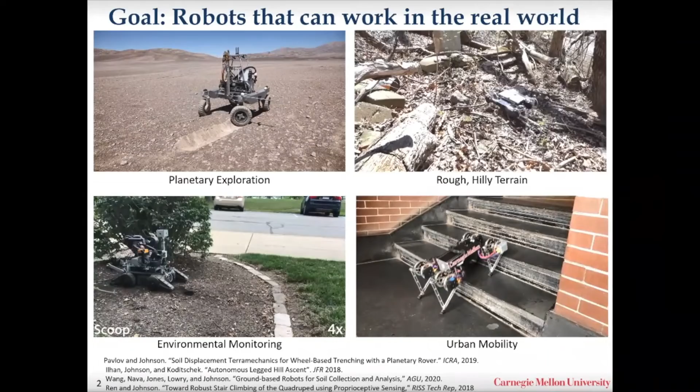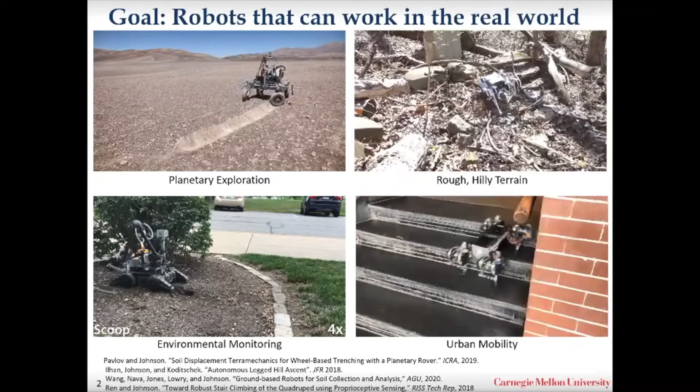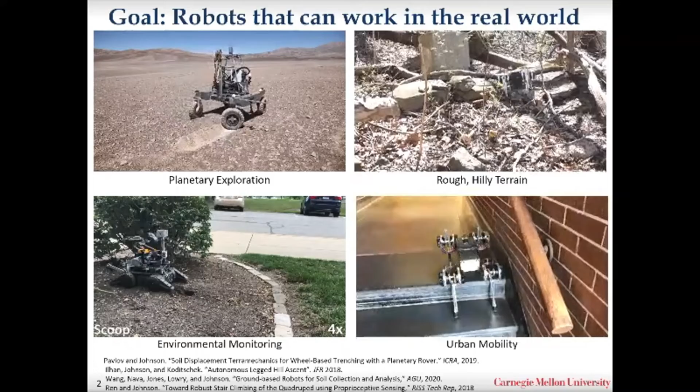So, as you mentioned, my name is Aaron Johnson. I'm an assistant professor at Carnegie Mellon, and my lab is interested in building robots that can go anywhere in the world. So we want to take robots out of the warehouse, out of the factory, and into more unstructured environments. And whether that's rocky, hilly, broken terrain that you'd find in natural environments, or stairs and sidewalks and curbs and clutter in human environments, the big difference is that we can't control the lighting, we can't polish the floor to be perfectly flat. And we're not going to know the friction. We're not going to know exactly which rocks are loose and all of these things.

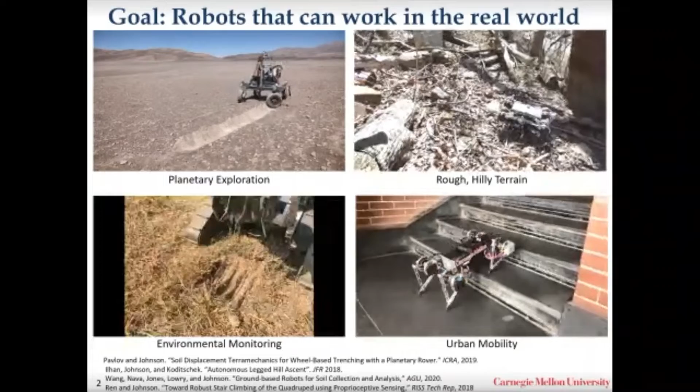So here's some of the applications that we're thinking about. Things like planetary exploration. Here's a Mars rover type vehicle running a test where we're using the wheels to dig in the sand instead of having another tool to do that. We also have a big project right now on environmental monitoring. So sending robots out to collect soil samples and look for contaminants in the soil.

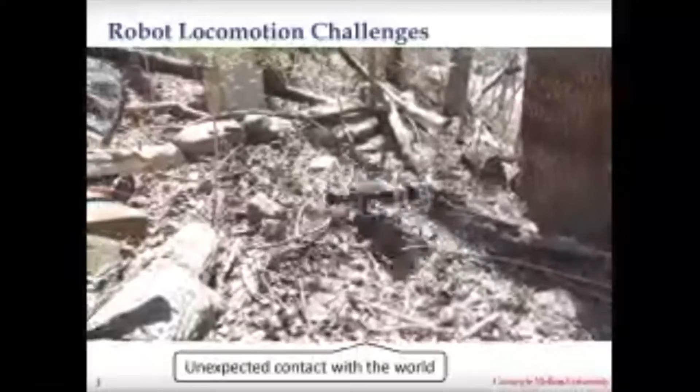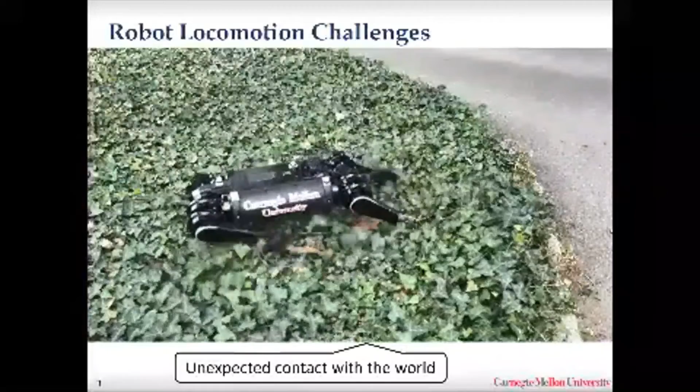And what are some of the challenges that come from these kinds of environments? So on the locomotion side, here's a blooper reel of some of the robots in my lab playing in the park behind campus. And what I want you to notice in all of these examples is that the failure really starts from unexpected contact with the world, either bumping into something you didn't think you were going to bump into, or trying to put your foot down and not having something there to support it. So here this robot is just trying to walk around, and it doesn't know that its leg is hooked on this ivy as it's moving. Or here it's bumping into this log that it thought it could step over, but it can't. And so it's running its shins into the log.

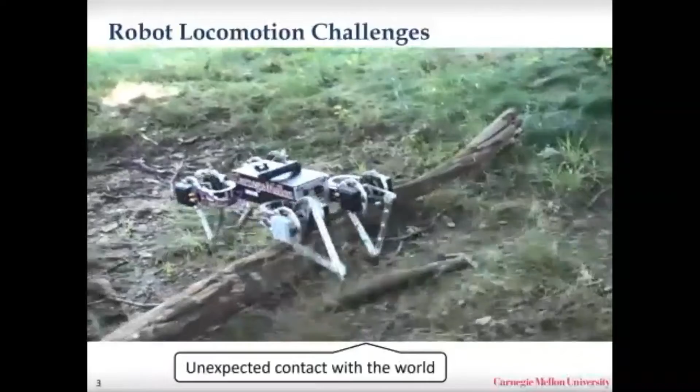Of course, the flip side is if you think that you're going to make contact and don't, that can be just as bad, if not worse. So for instance, in this video here, the robot's going to take a few steps, and then it puts its foot down, and there's not really as much support as it thinks, and it rolls over.

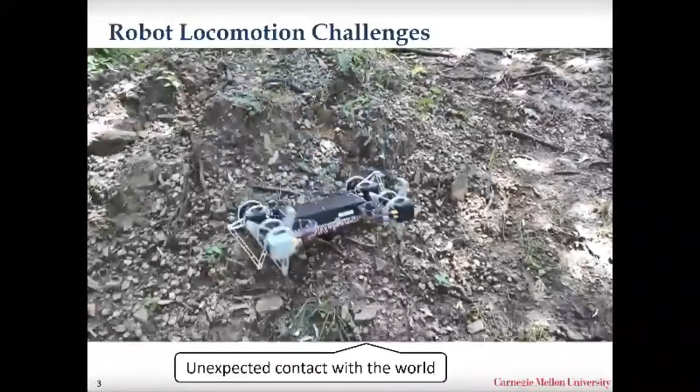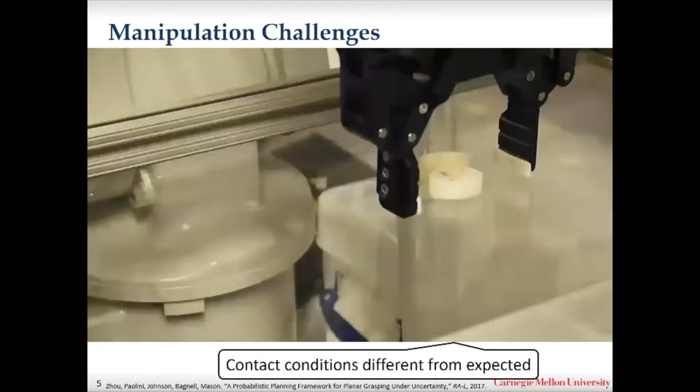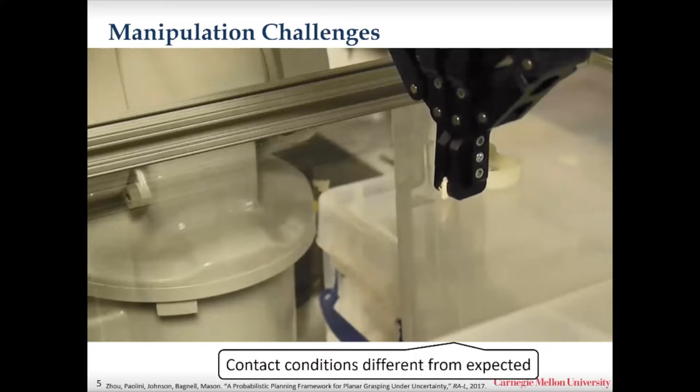There's also a big problem in manipulation. So it's not just locomotion. Here's a blooper reel from a paper we had picking up small objects, where all of the failures can be traced to either bumping into the object early, or having friction that didn't match what the model said, or just failing to bump into the object when you were trying to push it. And so this motivates the two key challenges that we think about in my lab of contact and uncertainty. And the challenge with contact is really the discontinuous nature of contact.

If you've got your foot 1 millimeter above the ground, then you get no contact force. And then as soon as you touch, you can have very large contact forces. And so this inherent discontinuity makes it very challenging to operate with.

And then uncertainty. Again, we're not going to have a perfect model of the environment that we're working in, and we can't control it. And so we sort of accept uncertainty as a given and work on designs and algorithms that embrace that uncertainty.

And then, of course, these two things play into each other, where if you have a discontinuous process like contact, where a small difference in state makes a huge difference in your contact conditions, then uncertainty plays a big role in that.

So in today's talk, I've pulled out two recent projects from the lab. The first on the more robot design side, looking at tails, and the second on the control side, looking at state estimation with contact. So I'll start with this sort of cheetah-inspired tail project. And this was with students Joe Norby, Jun Yang Li, and Cameron Selby, and then our good collaborator, Amir Patel from the University of Cape Town, South Africa.

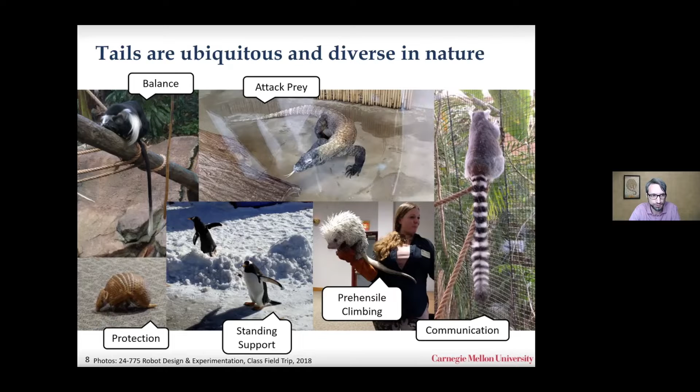And animals seem to be using tails for all sorts of things, either as balance or attacking or defensive postures, as well as communication. The lemur's tails, the reason you stripe your tail black and white in such a high contrast is so that it's easy for your friends to see you when you're trying to get their attention.

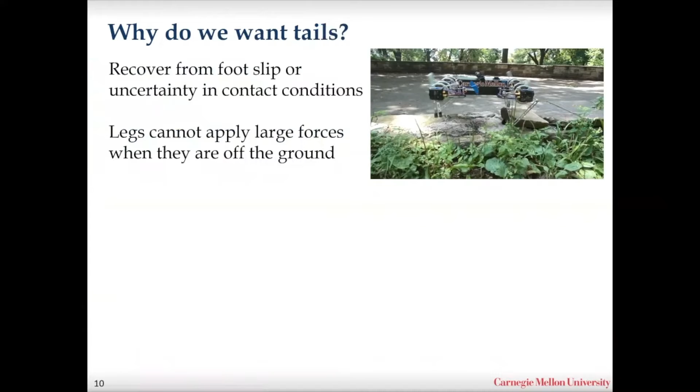So what do we want tails for in robotics? Specifically in this project, we're thinking about how do we recover from foot slip. If we're going to have uncertainty in contact conditions, we know that our feet are going to slip. That's a given. And one of the problems when your foot falls off a ledge is not only is that probably not what you planned, but now you can't apply any correcting forces with that leg. So you thought you'd be pushing on the leg, you're not, so you have to do something to correct, but you don't have any control authority out of that leg. So it's an especially tricky problem there.

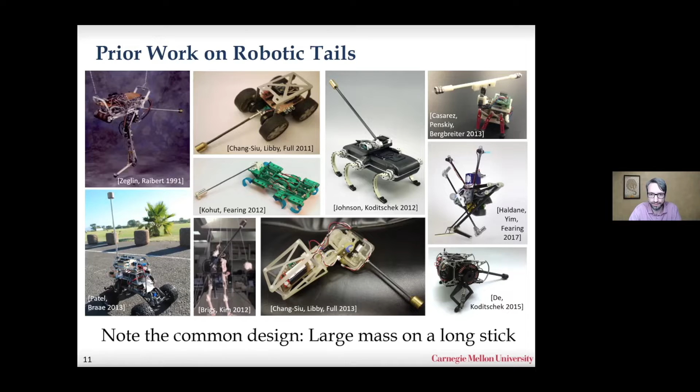And this is pretty similar to how lizards in particular use their tails dynamically, where they have big, heavy tails. A cheetah tail is only about 2% of the body mass, and most of that mass is at the base, unlike those robotic tails. And so the inertia is really small, especially if you think about a cheetah. It's this big, muscular animal, and it kind of has this foofy little tail at the back. If you're just getting equal and opposite reaction, it's just not enough force to actually matter at all.

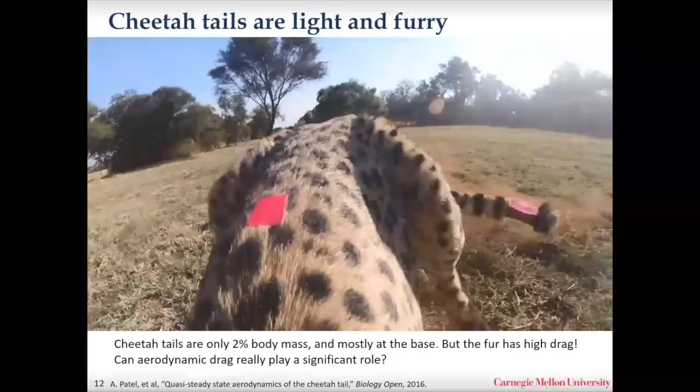But what they do have is a lot of fur on their tail. And you can particularly see this in this video where Amir's taped some pink tape on the cheetah to make tracking easier, and he sort of pushed down the fur near the tip of the tail. The tail itself is actually very skinny, especially out at the tip, but there's really long fur that has a very high aerodynamic drag. So the question is, can aerodynamic drag really play a significant role in the dynamics of cheetahs as well as in our robots?

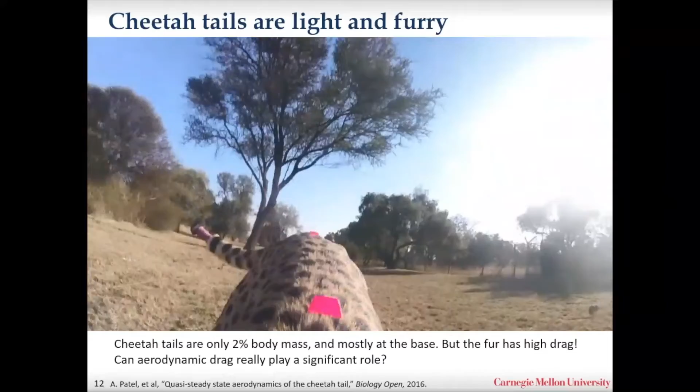So to try and answer this question, we calculate what we'll call tail effectiveness. And this is sort of how big a correction to the body's angle can we get for a given rotation of the tail. And inertial tails are very easy to model, and they're very directly proportional to the inertia of the tail. So if you double the inertia of the tail, you get twice the effectiveness. Right? And this just comes from this equal and opposite reaction.

With aerodynamic forces, the forces are a little bit more complicated. They scale with velocity squared as well as length to the fourth. And so we can't have a closed form solution. Instead, we have to integrate it over a particular trajectory. But from our aerodynamic equation here, we see that if we wanted to build a really effective aerodynamic tail, we would want to maximize the drag coefficient, the speed from that velocity squared, as well as the length for length to the fourth.

And so as a robot builder, I think I know how to make things long. That's pretty straightforward. If we want to maximize the speed, let's just gun it. Let's see how fast this motor can go and try and take advantage of that velocity squared. But we kind of got stuck on how to maximize the drag coefficient. So here's some pictures from some of the different tails that we've tested. Everything I know about aerodynamics, which is not much, is mostly about how to minimize drag. And here we've got a problem where we want to maximize drag.

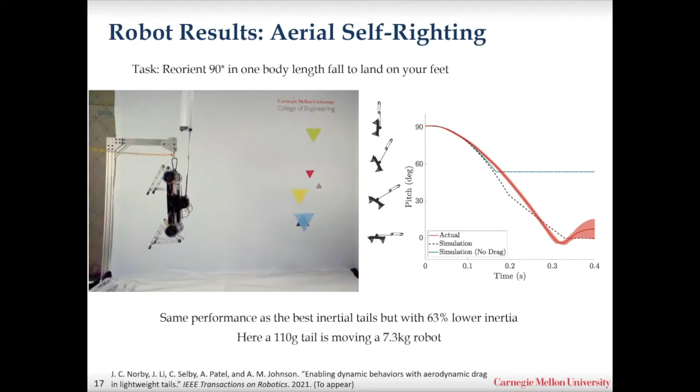And while the tail is very light, it still has a motor, it still has a motor controller and wires. So we are adding a decent chunk of mass on the back of this robot, but it's able to sort of more than make up for its own weight and actually accelerate much faster into a running behavior or a jump.

So with these tails, we found that yes, aerodynamics really can play a big role, which I think at first I was skeptical of because the cheetah is a pretty big animal, and you think of drag as being pretty small at the scales we're talking about. And this is especially true for long, lightweight, and high drag tails. And then we can actually translate this into pretty significant effects on the dynamics of our robot.

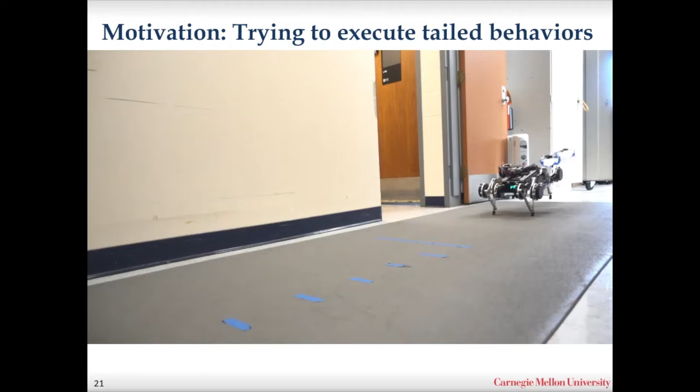Here's an example of a robot running a tailed behavior. Again, this is using the same, as we were sort of developing some of the behaviors with the tails. This behavior was generated with trajectory optimization, and then we're tracking it online as it's running. And it's working pretty well. So this is using that acceleration behavior into a running gait. This is slowed down, I think, 25% or something. And this works pretty well. And so we thought we had pretty good state estimation and tracking on the robot.

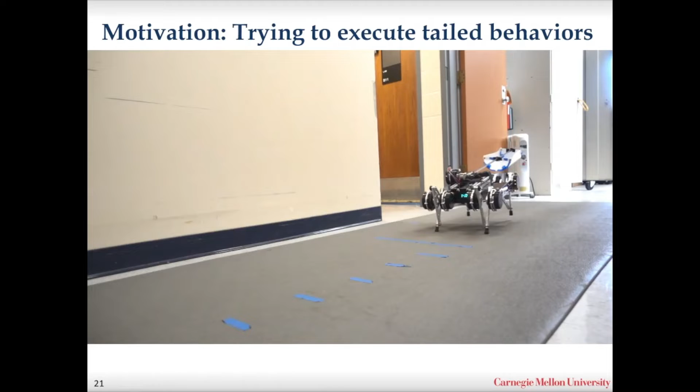And then we moved just slightly faster and generated a slightly different behavior with the tail and the legs. And the online tracking completely failed. So as it's going here, if you looked at the trajectories, they're very similar. We're not really asking for something all that different.

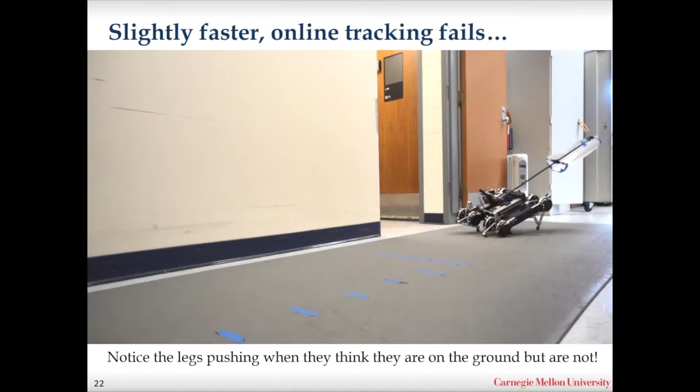And the robot isn't able to track it directly. If you look at the joint level data, the legs are actually staying pretty close to where we wanted them to be. In fact, you can kind of see them go through the motions as if they were on the ground, as if it was running along happily. It's just that the feet are just above the ground. And so when they go to push really hard, we don't get any acceleration on the body. And so again, this comes back to uncertainty in contact conditions and the challenge of state estimation.

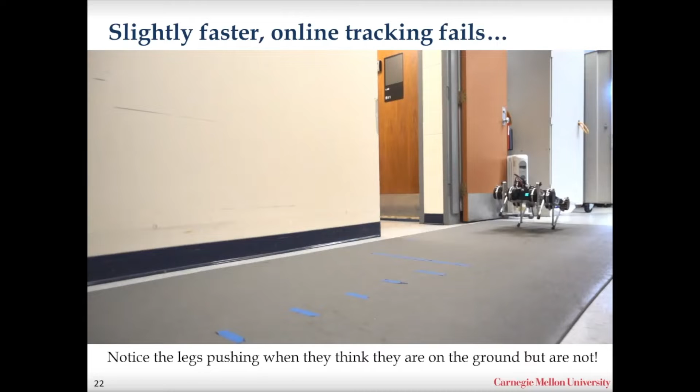So in the second half of the talk, we're trying to answer the question of how can we better estimate our system state, including the body position and orientation and velocities, under changing contact conditions as we're running them. And so the approach that I'll present today is looking at Kalman filtering on hybrid dynamical systems. And just to parse out some of the jargon here, Kalman filtering is the optimal linear state estimate based on noisy measurements. So we're going to take in noisy measurements and try and come up with the best estimate of our system state. And by hybrid dynamical systems, here I mean hybrid as in both continuous and discrete components of state. And in particular, our discrete state will be the contact modes, so whether a foot is on the ground or in the air.

All right, let's start with a quick crash course on Kalman filtering. Many of you probably already are familiar with Kalman filtering, but just to get everyone on the same page and to get our terminology straight, what is Kalman filtering? What we want to do is estimate our system state, and we're going to represent that state as a mean and a probability distribution around that mean. So this dot would be our mean estimate at time k, and we have some probability distribution, and in Kalman filtering that's a Gaussian around that. And this probability distribution says this is where we think our state may lie with different probabilities.

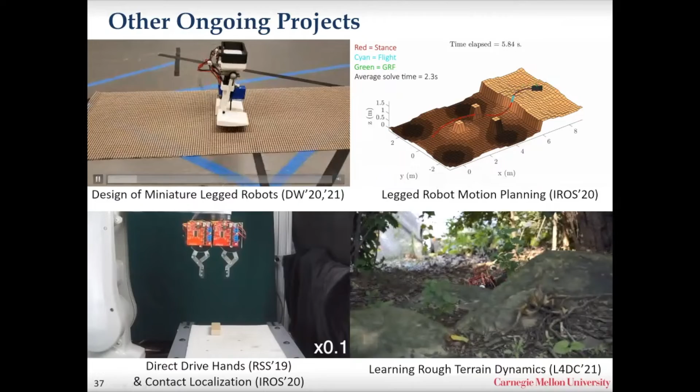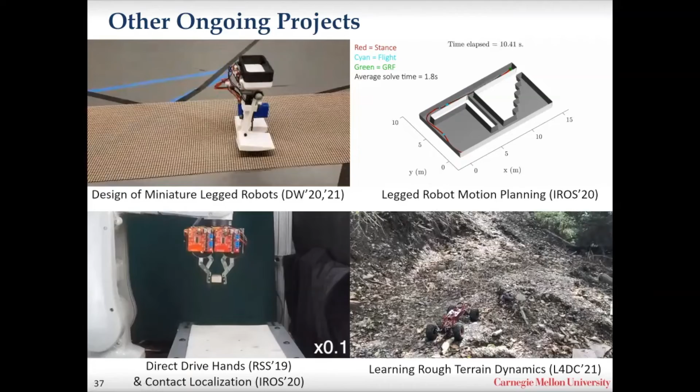There's a lot of other projects going on in the lab that I don't have time to get into too much, but real quickly, we're working on building very simple walking machines. In particular, we want them to be simple so that we can make them very small, with the ultimate goal of building something the size of a Lego that can actually walk on its own. We're also thinking about higher level motion planning and control for legged robots that are able to jump over obstacles, climb stairs, and do different dynamic behaviors.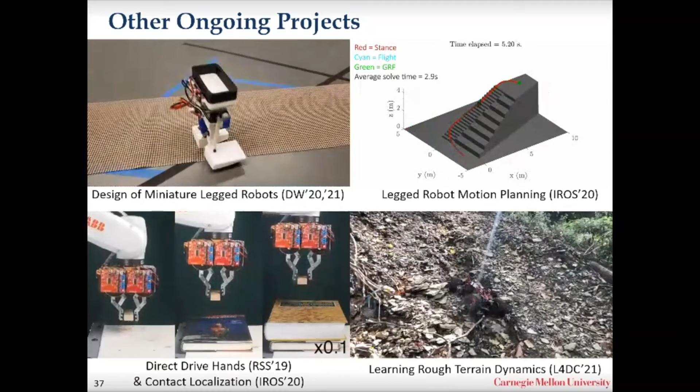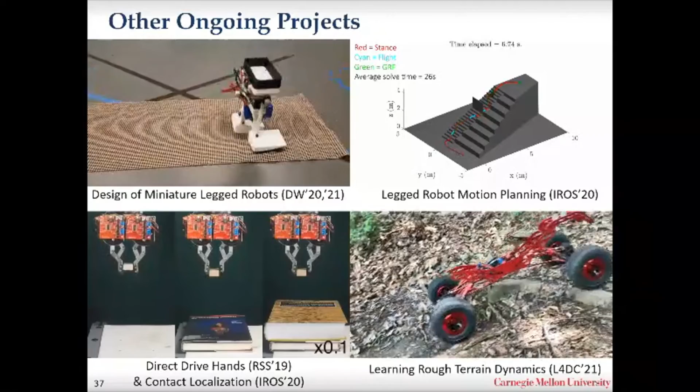I also work very closely with the manipulation lab. We have a joint project building direct drive hands. And the advantage there is that they're very transparent, so they're very back drivable. In this video, we haven't told it how high the table is or exactly what the shape of the object is. And we just smack the hand into the table as fast as we can. And we don't break the fingers and we don't break the table because the linkage design is very transparent to the contact uncertainty.

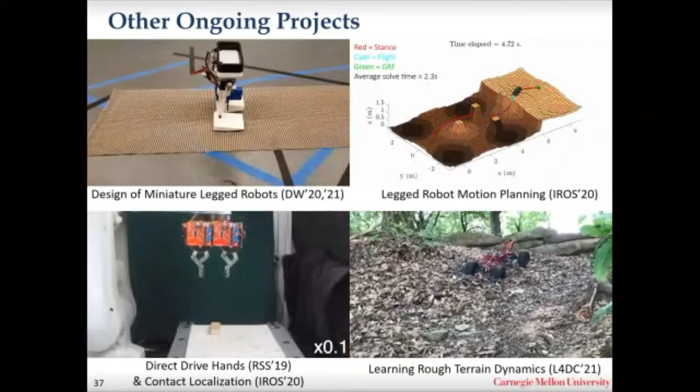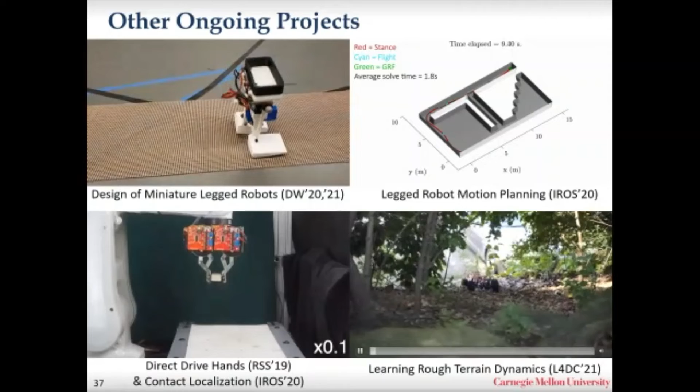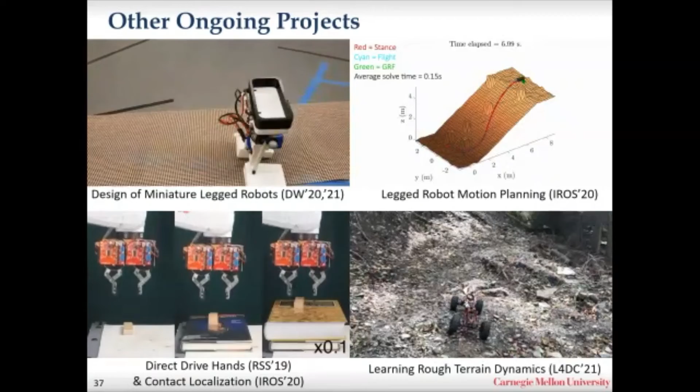And finally, we have a poster coming up in L4DC on learning rough terrain dynamics, and in particular focused on trying to leverage a large amount of simulation data with a small amount of more expensive robot data in order to learn these kinds of challenging dynamics driving over rough terrain.

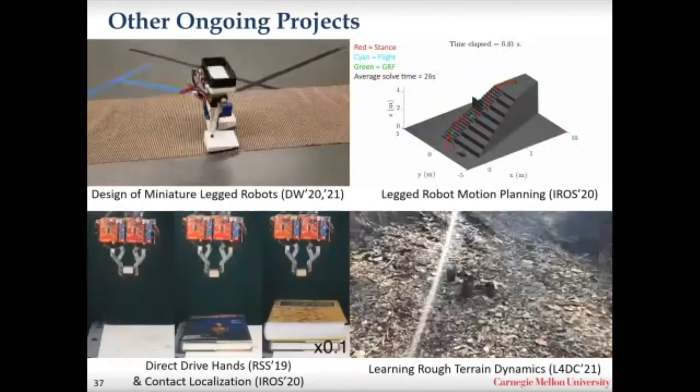But I wanted to leave, yeah, we're still good on time. I want to leave some time to talk about a new project that I have with Sam Burden's lab here at UW. And so I thought the best way to introduce this project, it's about multi-behavioral robot design, is I'm going to read you a children's book called The Mixed Up Chameleon by Eric Carle. You probably know him from The Very Hungry Caterpillar.

So this is a story about a chameleon who's bored. I'm going to skip the first few pages. I'll catch you up. A chameleon who's bored with his daily activities goes to the zoo and is so inspired by all of the animals there, he wants to take advantage, have the same sort of capabilities that they all have.

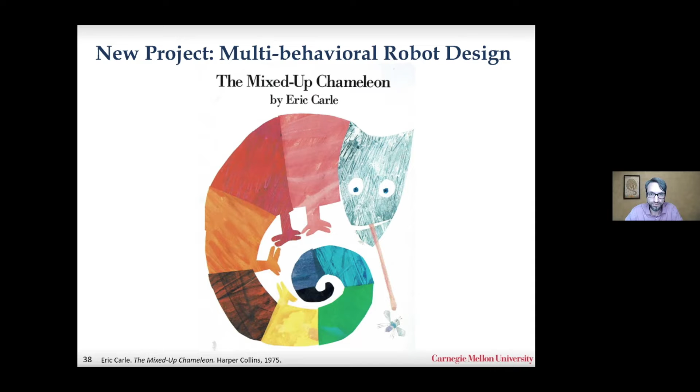All right, and so he says, the chameleon thought, how slow I am, how small I am, how slow, how weak. I wish I could be big and white like a polar bear. And the chameleon's wish came true. So now he's bigger, he's got this white hair like the polar bear. But was it happy? No. I wish I could be handsome like a flamingo. So now we've got some beautiful flamingo wings and legs.

I wish I could be smart like a fox. Apparently, foxes are smart because of their tail. But anyway, he's got a fox tail now. I wish I could swim like a fish. So we've added in some flippers so we can swim like a fish. I wish I could run like a deer. Again, I'm not really sure what the antlers have to do with running, but he's got some antlers from a deer now. I wish I could see things far away like a giraffe. So he's got a long giraffe neck now and can see far away.

I wish I could hide in a shell like a turtle. We've got a nice shell there so he can protect himself. I wish I could be strong like an elephant. Wish I could be funny like a seal. Apparently the flippers are the funniest part of the seal. And I wish I could be like people. And it looks like the defining characteristics of people are hats and umbrellas.

Just then a fly flew by. The chameleon was very hungry, but the chameleon was very mixed up. It was a little of this and a little of that, and it couldn't catch the fly. I wish I could be myself. The chameleon's wish came true, and it caught the fly.

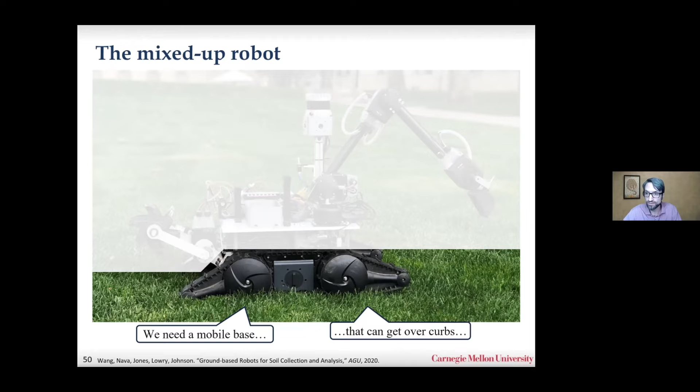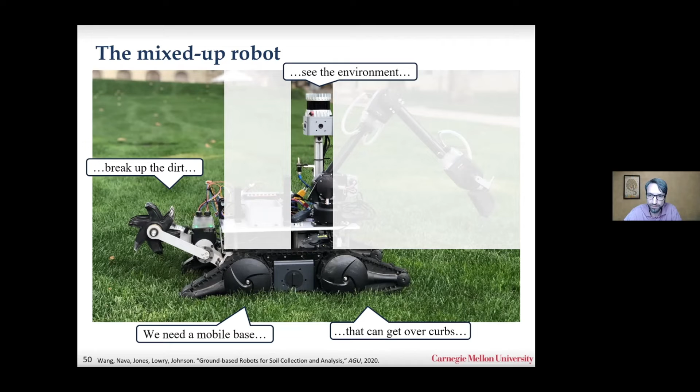We need to be able to see the environment. So we have a mast that goes up and has a LiDAR and cameras and stuff. We need to be able to break up the dirt to sample it. So we added a rototiller on the back with a high-speed motor. We need to be able to collect the samples. So we've got an arm with a scooper at the end to scoop up the dirt. And then we need to be able to bring that back to be analyzed. So we have some sample collection buckets on the back. And what we end up with is this kind of monstrosity of a robot here.

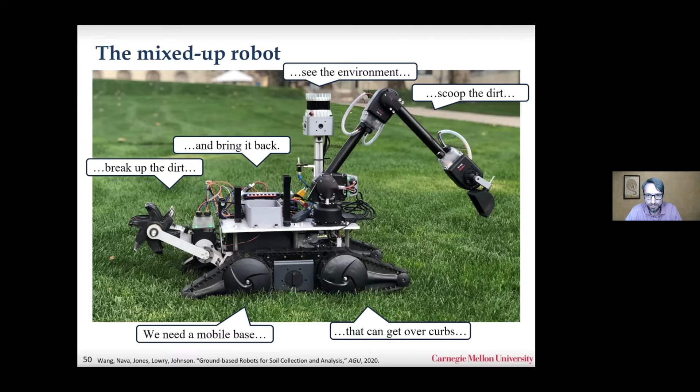And it's not just us. So here's a bunch of popular mobile manipulation robots. So these are robots that want to do at least two things. They all need to move. They all need to manipulate things. And I can literally draw a line between the mobile base and the manipulator arm that they used, where it's pretty clear that a different team, or maybe even a different company, designed the mobile base, and then someone bolted on an arm on top of that robot.

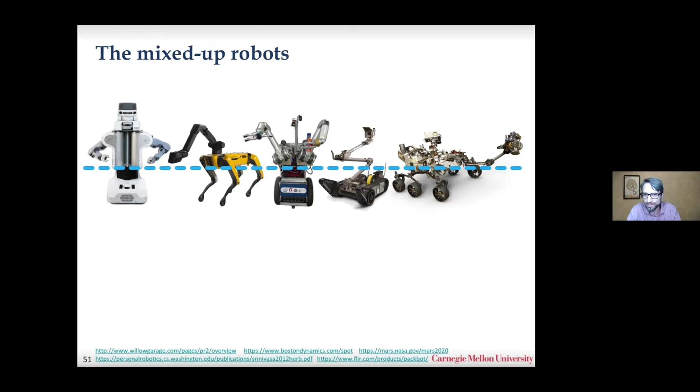So how do we do better than this? How can we design a robot that is good at multiple different things without just every time we have a new behavior, we strap on a new appendage? So this is an NSF NRI award with Sam Burden here at UW, my former postdoc George Council, as well as students Joey and Amber from Sam's lab. So we're just getting started, but we're making some good progress on coming up with more synergistic robot designs that should come out soon.

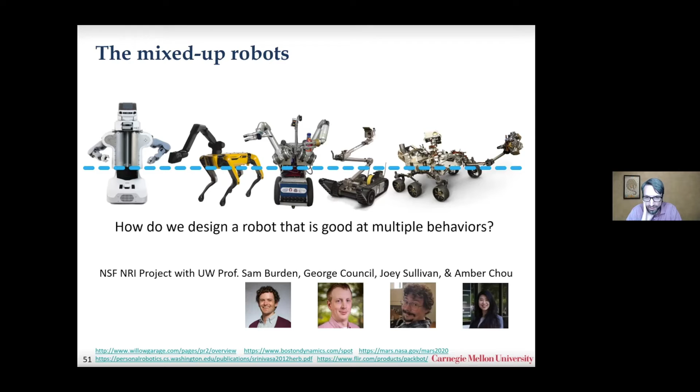Before I wrap up, I wanted to say a few things about supporting diversity in robotics. It shouldn't be a surprise to know that the demographics of the robotics community look nothing like the demographics of the rest of the country or the world. And I think it's very important for all of us to think about what actions we can take to actually improve this, because it's clear that if we don't actually take some actions, then the situation's not going to change itself.

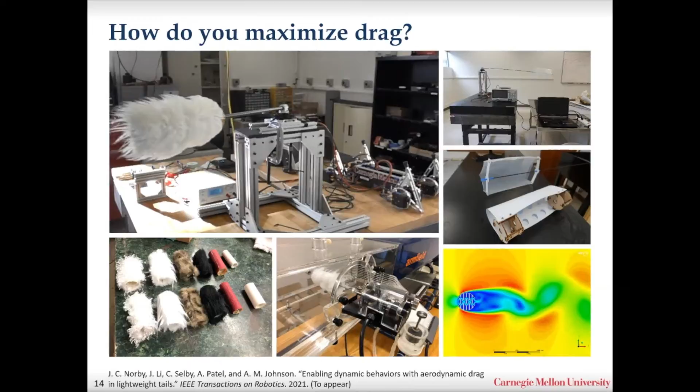The cheetah fur is actually pretty stiff, so it stays up even if the air is moving by at a high velocity. So I think it's sort of a materials question. I think there's also a lot we could do with 3D printing microstructures and these kinds of things to have something that's stiff but has a higher drag coefficient than we can get with these materials.

Again, I have never taken an aerodynamics class. I come from the electrical engineering side and control side, but we were working with someone in my department on the CFD side and doing these wind tunnel tests. And it's an interesting problem in that almost always you want to minimize drag. And there's been a lot written about how to minimize drag.

Here we want to maximize drag, with the caveat also that it's got to be pretty lightweight, because again, the heavier the tail is, we can't accelerate it as fast, and there's this velocity squared term that's pretty dominant. So finding a lightweight but high drag material is pretty challenging.

Yeah. So I have a number of questions I could ask, but the number one burning hole in my brain is, inertia is good for an inertial tail and bad for an aerodynamic tail. So it sounds to me like there's a trade-off to be had. I'm sure you've been thinking about it, but sorry, did you talk about it? What would the best tail design be with some inertia and some aerodynamics, or what does that trade space look like?

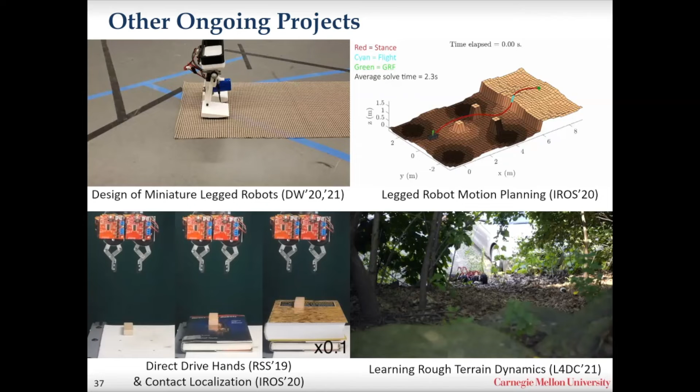No, definitely. We think a lot about what I would call proprioception in the lab. And I'll skip ahead. You kind of see it in this video in the lower left with this hand where we're using our fingers as sensors. There's no contact sensor. There's no force torque sensor here. In this case, the fingers are still, but the arm is moving. But we're moving the fingers through the world. We don't know where the table is. So here in a moment, it'll show we've sort of stacked up different books to get different height tables. We're running the same code in all three of these, and we're using the fingers as the sensors.

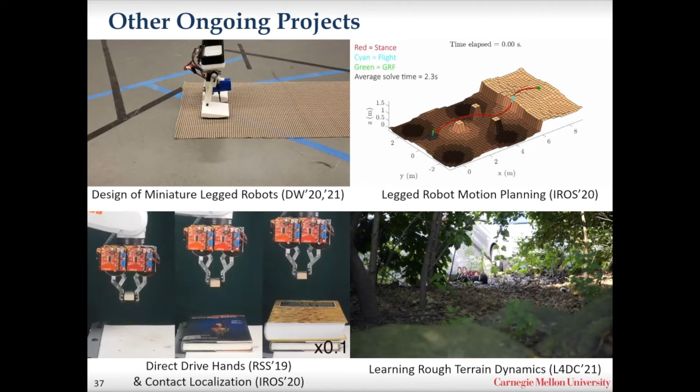And this is, I think, a very good way to go. Lots of people use tactile sensors. Those are either not sensitive enough, or they break all the time. There's always new tactile sensors coming out, so maybe they'll get there eventually. But I think of the fingers, or the legs in the legged robots, or the wheels in the wheeled robots as being free sensors. They're already interacting with the thing that we're trying to measure, and so let's get as much proprioceptive information as we can out of them.

And so our IROS paper in the fall was on contact localization for this hand as well as some of the legged robots, figuring out not just did you hit something, but where on your limb did you make contact, completely proprioceptively. Yeah. You can picture when you make contact with the ground, that tail flops all over the place.

Yeah, definitely. And animals drag their tail in the ground all the time in a way that, in robotics, we're often sort of afraid to bump into things, right? We've got our wheels or our feet, and that can touch the ground. But if the body bumps into the ground, or the manipulator arm or your camera head touches the ground, that's usually considered failure. But that's not the way the animals work. They're dragging things through the dirt all the time.

And so one, I think we need to be designing our systems to be okay with that. If we're going to run in challenging environments, we know we're going to bump into the ground. And two, we might as well do that intentionally. Yeah, definitely.

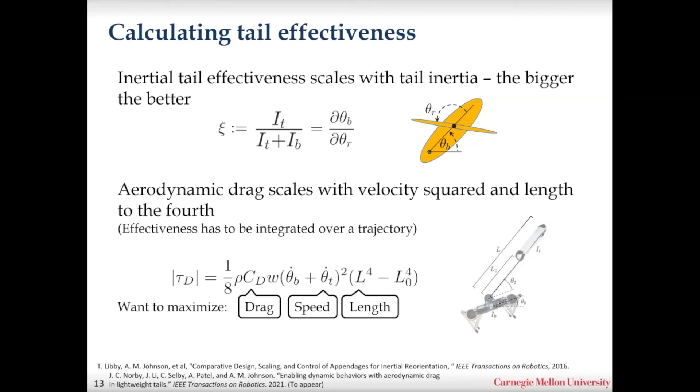Yeah, certainly if you're running very fast in the forward direction, or if you think about the drop test, if you're falling very quickly, and you can sort of put your tail out into that airstream that's going by anyway, that's just going to increase. Here we just have it as a theta dot, but this is really the velocity of your tail relative to the airstream. So if you're moving very quickly, that only helps, as long as you're pushing in the right direction. Gives you a much higher effective velocity.

Yeah, our robots don't run at whatever 70 miles an hour that a cheetah can, and so it's a little bit less of an advantage in the robot. But as we start to run faster, that'll certainly play in. Yeah.

I was just wondering, in future iterations of the research, do you see that the tail design could be more articulated, maybe using soft materials and stuff? I don't know if that is actually useful, or what are your thoughts on that? Yeah, I mean, certainly you look at these animal tails, the armadillo's may be pretty close to 1 degree of freedom, but the rest of them are all very soft and flexible. Some of that is what they're working with. It's much harder and much more dangerous to have very rigid things in biology.